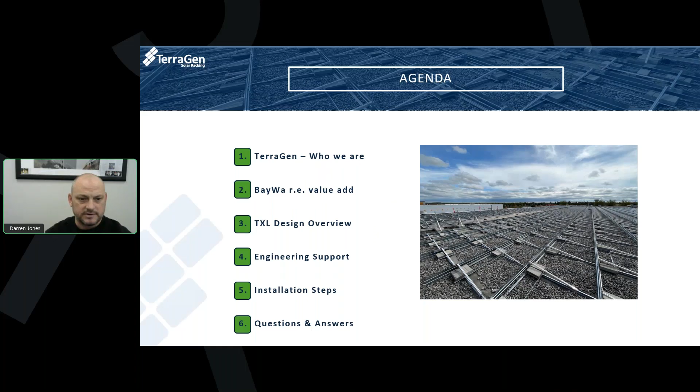As we get going here, we're going to look at the agenda. So we're going to start with a background, who we are, how we came to be, look at some of the value add and what the partnership will mean for you folks. We're going to go through the TXL design overview, the product specifically being offered through BayWa and stocked. We're going to look at some of the engineering support that you can expect from us in terms of drawing packages and ongoing support for your installations. We're going to look at some of the installation steps and how the system goes together. And then we'll round up with a Q&A period.

So a quick background on the company. My name's Darren. I've been with Terragen pretty much since its inception. I am the president here. Terragen was founded by my father back in 2009. The background of Terragen is an interesting story and one that might resonate with many of you, in that Terragen was established to be an EPC and developer.

So for the first few years of our company, we spent building rooftop solar projects, installed a lot of different racking types. We got into racking sort of inadvertently, primarily as a complementary product for our EPC division, which we quickly gained traction on our racking offering. So we started selling the racking systems through a formalized racking division. At the cancellation or sunsetting of the FIT program, we decided to shut our EPC division down and focus strictly on the racking aspect of the business.

So for clarity, we no longer offer EPC or installation services, but the foundation of our racking division was based on that. And so a lot of the requirements and needs and wants of EPCs and installers, we have a good understanding of.

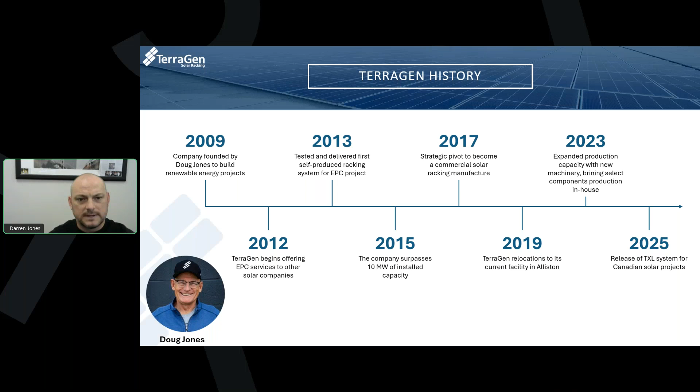Where we are today, so our systems are sold across Canada. They're going to be accessible through BayWa in multiple stocking locations. We also service the US and the Caribbean markets.

A couple milestones about the company. Like I said, 2009 we were founded, so we've been in business for 17 years. We've got over 3,000 racking projects supplied to date, which equates to over 850,000 modules supported by our solutions. High repeat customer purchase rate. We really put an emphasis on upfront design work, on-site support and installation support, and it tends to lead to customer loyalty, and people that work with our products tend to enjoy it and continue to work with it. To date, our racking solutions are on over 400 megawatts worth of projects. So we're excited to expand that with the BayWa partnership.

Yeah, I guess I can jump in now. How's it going, guys? I'm Dale. I'm a part of the sales team here at Terragen. I've been with the company 4 years as of the end of this week. Today I'll walk you through the TXL system that we'll be offering through BayWa and the advantages that we will be seeing. We're excited to be partnering through BayWa and leverage their distribution network across Canada to help bring better product availability to the market.

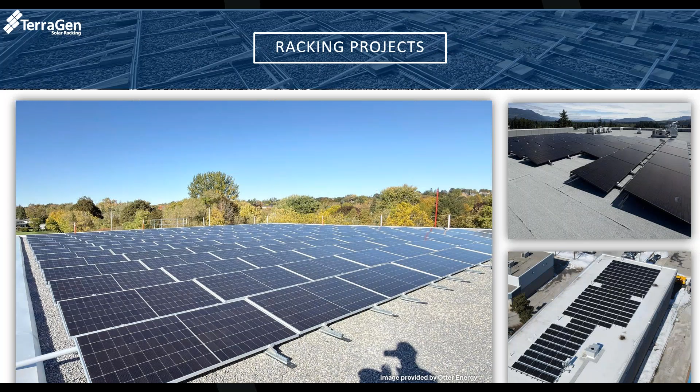The TXL system is a landscape rail-based system. We released it at the beginning of 2025 in reaction to the onset of NBCC 2020 and the provincial adaptations. Since then, over the last year or so, we have 30 megawatts of the TXL system installed or to be installed, and have been getting very great feedback so far.

The TXL system is made up of four major components. The first being the base rail, a continuous rail that runs north-south throughout the array. This rail comes hole-punched with the pattern of the design to accept the tilt assemblies, the ballast rail, and the wind deflector.

This is a pretty standard set of bill of materials per panel, with the exception of some splices or east-west rails for connecting throughout the array.

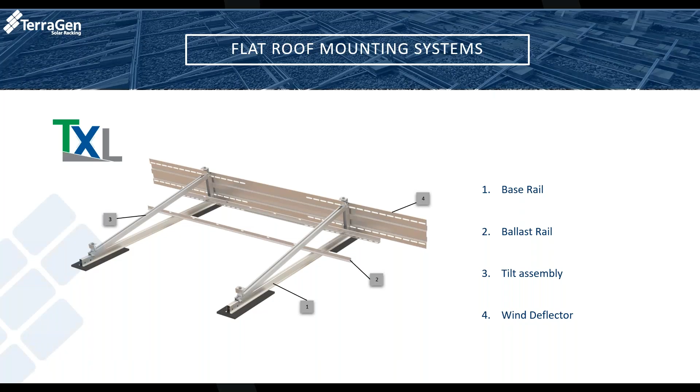The reason we talk in this sense is with a rail-based system, the hole pattern is set in the rail and accepted by the triangles. So as we fluctuate between panel sizes, the interrow spacing would get bigger or smaller, but the front-to-front dimension would stay the same, matching the length and hole pattern of the rails.

Yeah, Dale, if I can just jump in for a second. I know you'll touch on this on the installation efficiencies, but one thing I want to point out here is the base rail hole pattern comes pre-punched, so there is not the ability for on-site adjustability. This is done intentionally, for constructability of the product as well as those installation efficiencies. So with those holes locked, the interrow is the variable if the module dimensions are different.

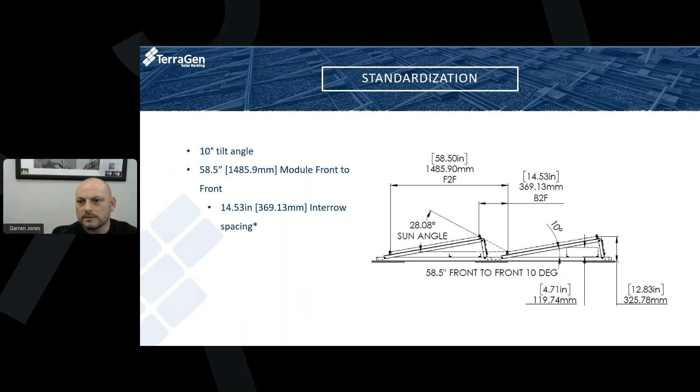Yeah, adding on to that as well, the configuration and design data that went into this was leveraged from our almost 10 years of being exclusively a racking manufacturer. So we've used the most common design that we see across the market.

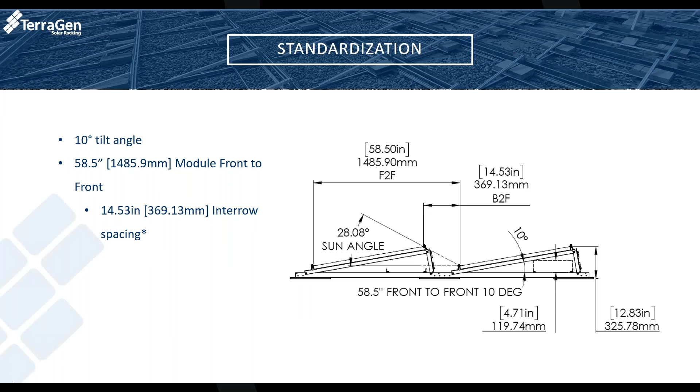When going through the design and release of the TXL system, there are a number of different ways that we validate the product. Some of them being the wind tunnel test completed by RWDI, peer-reviewed by a third-party accredited laboratory, resulting in a system that is compliant with NBCC 2020 and all provincial codes.

We also meet many standards, UL 2703, UL 3741, and while those are US standards, we try and go above and beyond on our certifications. We also have additional testing in other aspects, such as friction testing for seismic regions, which we can get into on the next slide.

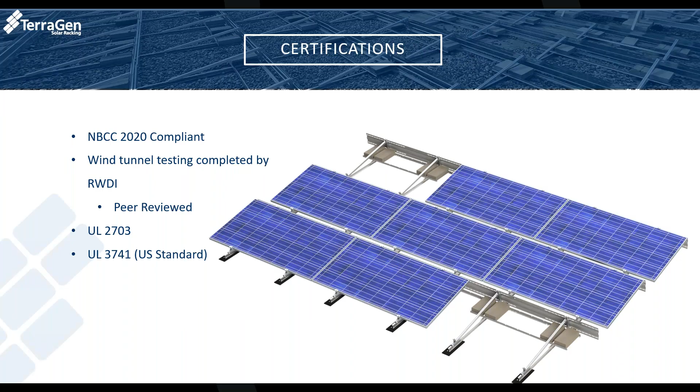With the TXL system, there are a number of different options to resist uplift. Most commonly is a ballasted solution. Our TXL system can accept a typical ballast block, which would be a 16 by 8 by 4 inch block, around 33 pounds. The other option would be through mechanical attachments.

These mechanical attachments are pretty agnostic to what is out there in the market. We have the bracket and hardware, and as far as the attachment goes, many of the common attachments on the market are compatible with our system.

Under NBCC 2020, there has been a change to a lot of the seismic requirements, meaning earthquake lateral loading, and we have seen an increase in the areas and geographical regions where seismic loading is required. So more commonly now than ever are we seeing anchors having to be integrated for seismic resistance, even when we can offset the full uplift weight of the system with ballast.

Yeah, if I can just jump in on that as well, Dale. With respect to seismic in particular, given the various building characteristics, there are ways in which we can design around the requirements for mechanical attachments sometimes, not always. So we really do need to go through the full design process to understand what a project would require. And while the system itself has modularity and a standardized set of components, the specific bill of materials may change on a project-by-project basis, given the location and the building considerations.

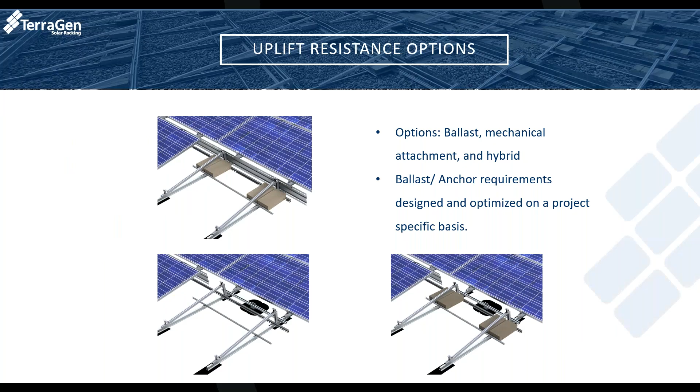That flows nicely into our next point, which would be our design packages. We'll open up some documents here.

Initially, to prepare our design packages, we would request a technical planning form. That is what is on the screen now, requesting information on site conditions, modules, building height, parapet height, and everything we would need to consider when designing the system.

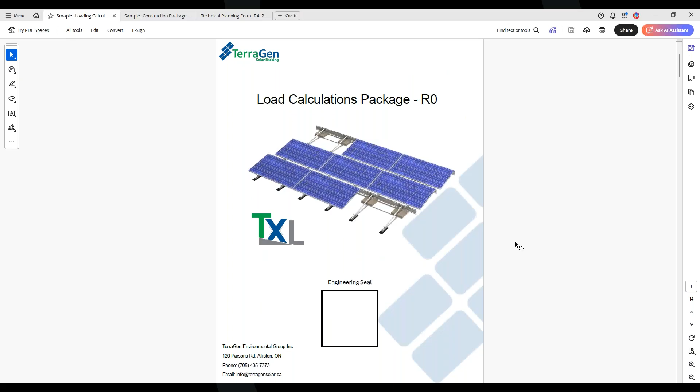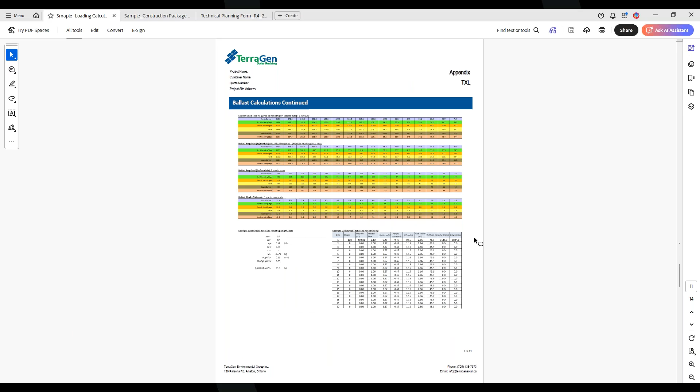With every project, there would be two packages that we prepare. Both are stamped by an engineer licensed to stamp in the province or territory where the project is. The first package is the load calculations package. This is an overview of the calculations and code references we factor in when completing the design to arrive at the uplift and site locations for the system, resulting in the ballast or anchor plan.

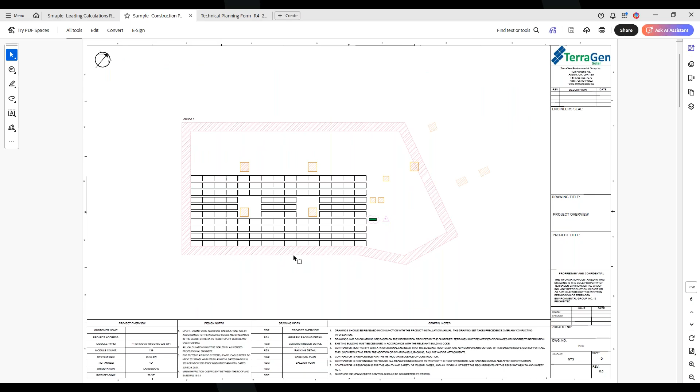The other package, and what a lot of our client base enjoys, is the construction package. This stems back from our installation days when we were making site-specific installation drawings for our crews. This document starts with generic details of the system, showing how the splices go together, how the clamps click on, the wind deflector, and the ballast configurations, then gets into more project-specific details.

This here is an outline of the rail plans of the system. It shows where each rail needs to be located, where each splice location is, the dimensions between the rails, as well as dimensions to starting points of the building, which we can provide assuming a CAD file is given to us.

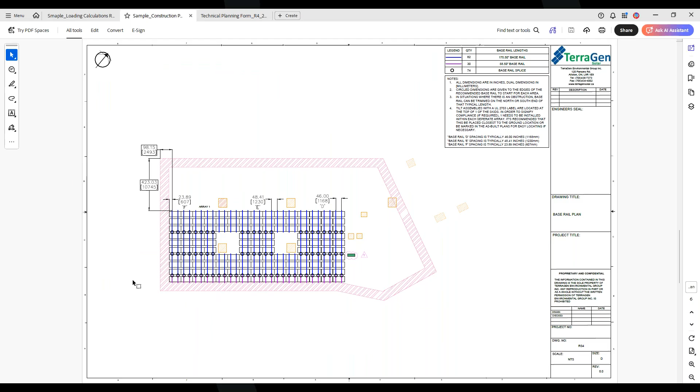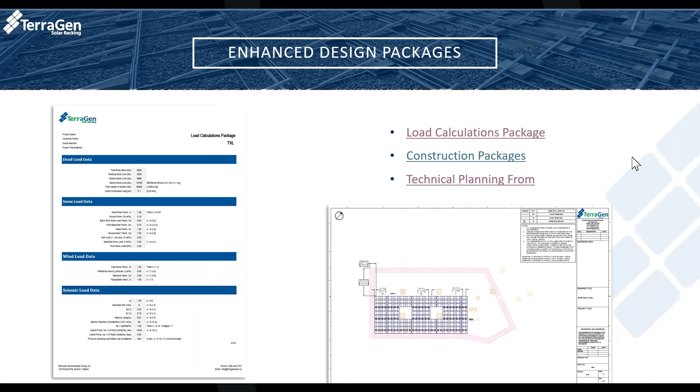Heading back into the presentation, I'll walk you through some of the installation steps of the TXL system. As Darren mentioned earlier when talking about the design, it's a preset design, and all the hardware and material comes to site in accordance with that design, allowing for minimal on-site measurements and rapid installation speed.

A design or installation metric we got recently was that a crew on one of their first installs was able to install the system, including racking, ballast, modules, and DC wiring, in about 2 man-hours per panel.

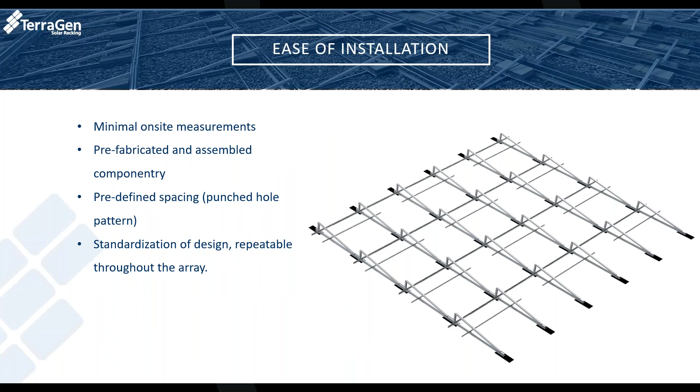The first step of the installation would be laying out the base rail. Through laying these out, we also have a product called the base rail spacing jig, which comes included on all TXL orders. These jigs ensure the spacing between the base rails is consistent and in alignment with what is outlined in our design packages, as well as ensuring the array stays square throughout construction.

Once the base rails are laid out, the next step is to install the ballast rail, which also serves as the east-west connection between the system. In the base rail there are pre-installed riv nuts in the top, so you just lay down the ballast rail and insert and fasten the hardware.

Following that, the next step would be the tilt assemblies. These are pre-assembled at that 90-degree bend at the top, which can be opened on site, the tilt legs folded out, lowered down onto the base rail, and bolted through the holes pre-punched in the base rail.

On top of the tilt assembly you'll find a stud, which we use for module placement. It doesn't have to be fastened to the panel, but when you lay and drop the panel on top of the tilt assembly, you can slide it down until you hit the 2 studs, ensuring the module is positioned correctly.

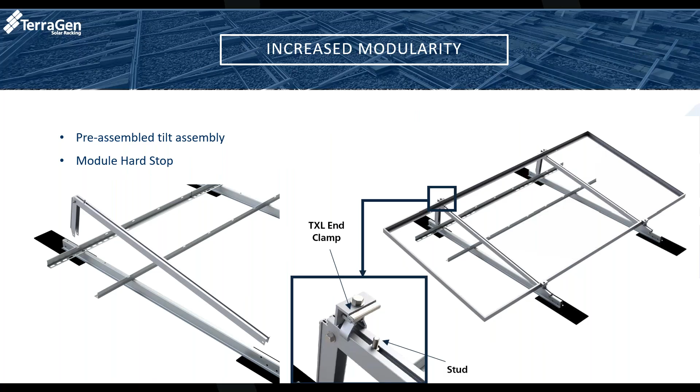The final piece would be the wind deflector, which can be installed after the ballast and wiring is completed. Similar to the module positioning stud on top of the tilt assembly, on the back legs of the tilt assembly there are 2 protruding studs already integrated into the rails when delivered to site, so the wind deflector can just align and slide over the top, and the nuts can be fastened down.

Going through installation, there are a number of different ways we can aid in supplying you with the information you need to install the system as efficiently as possible. As part of our typical process, for every new installation crew or company, we would be happy to do a construction package walkthrough. This would include a more detailed analysis of the design drawings for the site, with special emphasis on any unique or project-specific constraints or considerations.

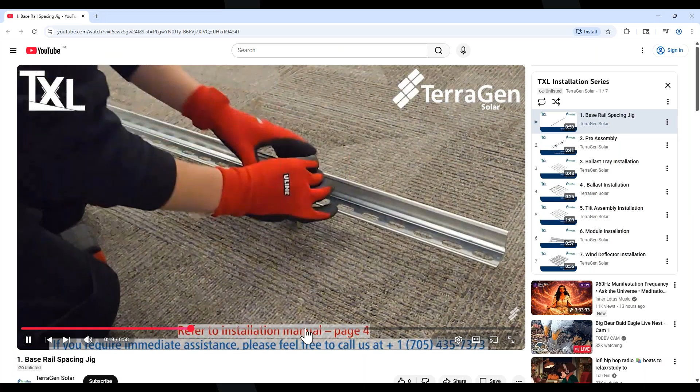The other option is the TXL Installation Series. This is a YouTube playlist we have. Let me show you a sample video here. This would essentially just walk through each step of the installation process. In this video is the setting up of the installation jigs. There's another video for basically every step of the way, showing you what that would look like and what the proper method would be to install.

One thing to note as we're watching this: there's a generic installation manual for TXL, there's a project-specific construction package, and there's the installation series video set. Especially for new installers, we recommend you review all of them, and then when we get to the construction package walkthrough, we can address any questions or concerns and give you installation tips. Again, we're really just trying to do the necessary activities up front to allow you efficiency on site.

That kind of brings us to the end of the summary of the TXL system. Just a quick recap of what we covered today: some background on TerraGen and who we are, our long-standing familiarity with solar racking and projects in Canada, as well as the advantages of the partnership with BayWa that we're excited to offer, and the TXL design systems and engineering support.